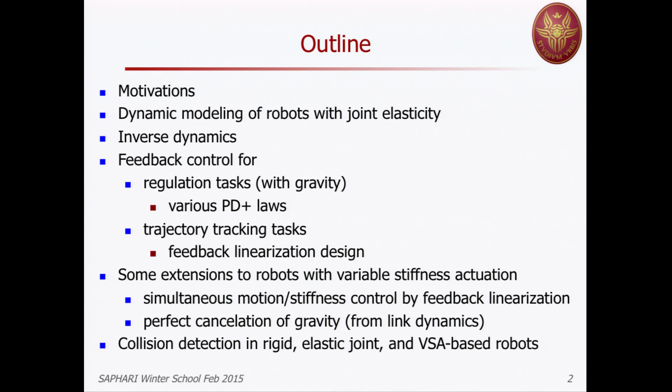And then when you address the more challenging issue of following a trajectory and recovering from disturbances and errors, we will use the feedback linearization design technique. So all this, in a sense, generalizes what you already know well for rigid robots—from the Siciliano Sciavicco textbook—to the case of elasticity and flexibilities.

So having presented this for the joint elastic case, I will then extend to robots with variable stiffness. There we are interested in controlling not just motion but also stiffness, as we mentioned. So how feedback linearization can be used for doing simultaneous and decoupled control of motion of the links and stiffness of the joints. We will address this for a single device, but the extension is pretty much straightforward to multi-degree-of-freedom systems, provided you have a good model.

And then I will conclude with this perfect cancellation of gravity, and then some examples of using these techniques for collision detection and reaction.

Okay, motivation: why do we address flexibility, and in particular flexibility in the transmission? Well, in industrial conventional robots, which are massive, the first thing that is compliant is the transmission.

So if you have a long shaft, like in the traditional Puma arm, where the motors are mounted on the elbow and three motors drive the last three joints, you have this long shaft subject to torsion. You can model this torsion as a concentrated torsional spring, in fact.

Or if you're using harmonic drives, which are inline, compact, large reduction ratio transmissions, they are intrinsically flexible because of their construction—the fact that they have a different number of teeth on the inner and outer gears introduces this kind of flexibility.

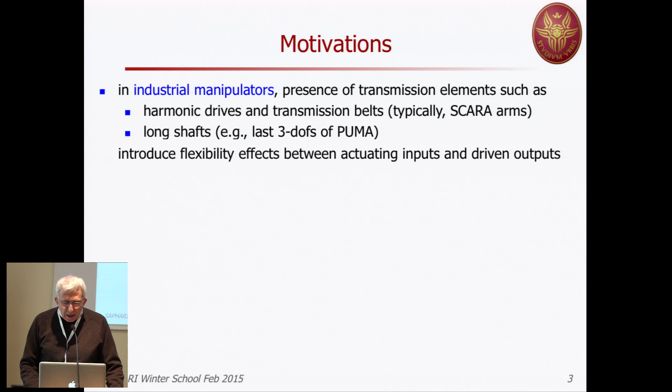There has been an intentional introduction of flexibility. Up to some years ago, harmonic drive technology was something you would want, because it gives a reduction ratio of 150 to 100 with relatively low dissipation of power. So you can have a small motor driving heavy links, but you have to live with vibration induced by the flexibility of these joints.

A completely different story is when you introduce flexibility on purpose, like in series elastic actuation and whatever you've heard so far here. There are several reasons for doing this. I'm mentioning only safety, but there are also performance and energy aspects which are very important.

How is this introduced in this type? Here are some examples, including variable stiffness actuation, or a device developed in Stanford, a redundant macro-mini or parallel actuation device where you have two motors for moving a joint, but one motor is located at the base with a transmission, and a small motor at the joint which corrects the flexibility induced by the transmission.

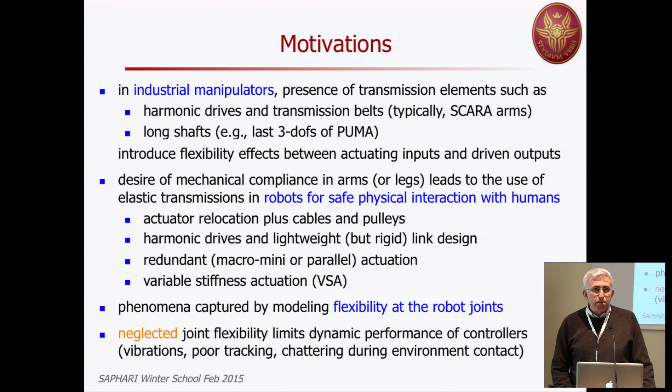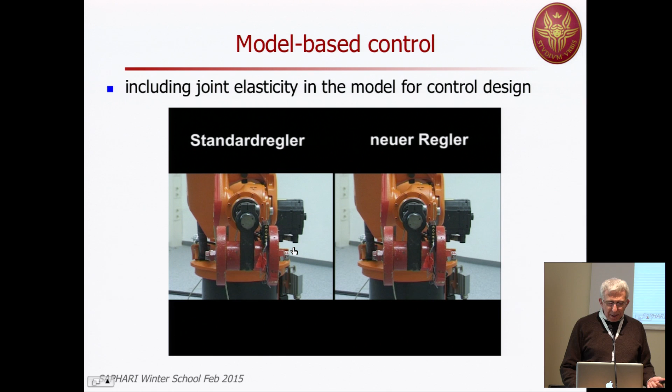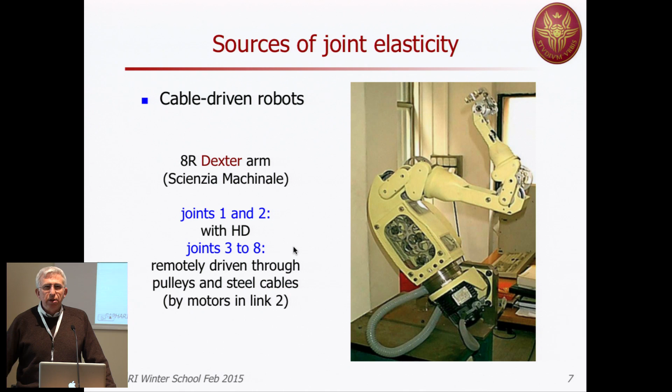This arrangement makes sure that it enables the fact that this arm, which is human size-like, as you can see, is 20 kilograms as a total, in motion.

While for the joint elastic case, we typically remain in the domain of linearity, although you can consider also some nonlinear effect, but you excite this nonlinear effect only through motion, and you cannot control directly the actual deformation. Okay, so we focus now on this situation.

This is just a single joint. Theta is the position of the motor, Q is the position of the driven link, and you have some elastic torque going through the transmission. The transmission has some stiffness K, and let's say constant stiffness.

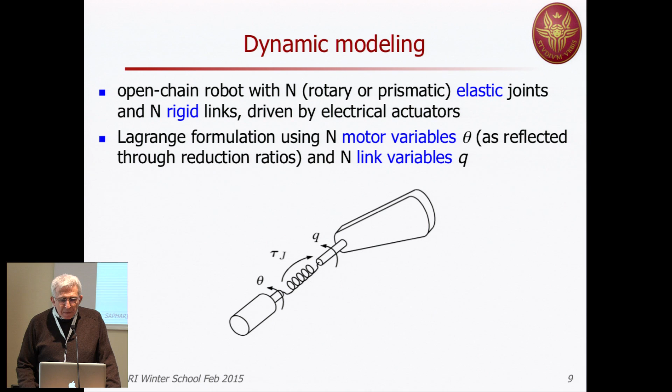And then you set up a set of generalized coordinates, in this case 2n generalized coordinates, if n is the number of joints, so 1 coordinate for each of the motor and of the driven link, and then you apply the Euler-Lagrange equation. So if you do this, you have to derive all these energy terms.

So there are some basic assumptions which are really always satisfied, at least the first two. The third one, most of the time, let's say 95% of the time. The last one is an approximation, but it's very reasonable when you have a large reduction ratio. So the first one says that, well, simply, we are in the linear elasticity domain. This is an assumption. You can relax this without major problem.

The second is obvious: all the motors are balanced, which means that the center of mass of the rotating motor, we are assuming electrical motor, let's say DC motor or whatever, is on the rotation axis. Otherwise, you would throw this motor away after a few minutes, few hours of operation.

The other assumption is more at the system level. So each motor, let's say, suppose that we have one motor for each joint. But anyway, even if we have a combination in parallel, each motor is mounted along the open kinematic chain in a position which precedes the driven joint. You typically think of a motor mounted exactly on the axis of the joint, but this is not really the normal case. This is included in this assumption. So either it's here or it's before.

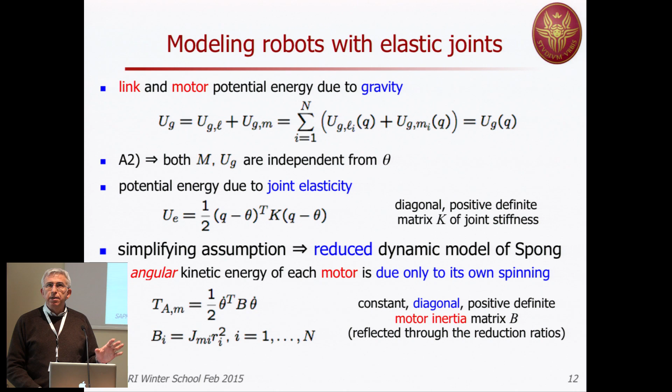And this is very reasonable, especially if you have a large reduction ratio. It's not perfect, but it works. And in practice, this has become the standard.

So once you have put also this assumption 4 and you build up the Lagrangian with the total kinetic energy minus total potential energy, you have this 2n-dimensional set of generalized coordinates. You apply the Euler-Lagrange once for all.

You will never use this again because you already know what is coming out. For instance, you never reintroduce this and then make this derivative, because you already know that in the kinetic energy, what is here and here is actually in the quadratic form, so you don't need to do partial derivatives if you're deriving these models in a symbolic way.

So the end point is this one, and we will start from this two set of equations, which I call link equation and motor equation. This, up to here, is exactly like the rigid case.

In M, you include already the presence of the motors, okay? At least the linear part of the kinetic energy. These are the Coriolis and centrifugal terms. This factorization is such that M dot minus 2C is skew-symmetric if you wish, otherwise you don't need that.

And here, of course, you don't have any non-conservative force performing work on the link coordinates. We are assuming that there's no dissipation term and no external force acting on the link, while the torque produced by the motors produces work on the motion of the motor variable theta.

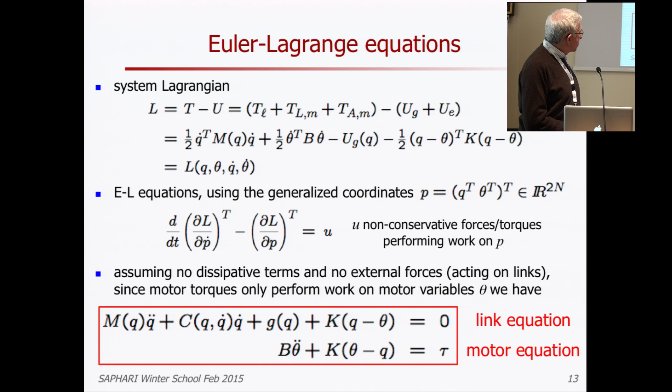Instead of looking for this limit process, you can go back and just add up these two equations, so that this term cancels and you don't worry about the fate of this infinite times zero form. Of course, you keep q equal to theta, so theta double dot becomes q double dot, and you have this B adding to this part, ending up with the equivalent rigid model, which is exactly what you expect, with the diagonal B matrix adding to the residual part of the kinetic energy we have computed so far.

When you have joint elasticity, you have to split these two parts. And if you remove the Spong hypothesis, then this splitting is not so clean as here, because you have also coupling terms appearing.

Then this is another famous inequality, because the gravity part is acting only on the link side, since the motors are balanced with respect to their center of mass. So the gradient of the gravity vector, the Hessian of the potential energy associated to gravity, is upper bounded in norm by some constant alpha.

This also implies another inequality, which is very convenient in proving global asymptotic convergence of the PD plus controller. I would invite you, when you have time, to apply this to a simple structure and understand the role of each assumption.

So here it's a planar 2R robot with elastic joints. This could move in the vertical plane, so you include gravity, or in the horizontal plane, so you don't care about that. And of course, you have a position of the motor here.

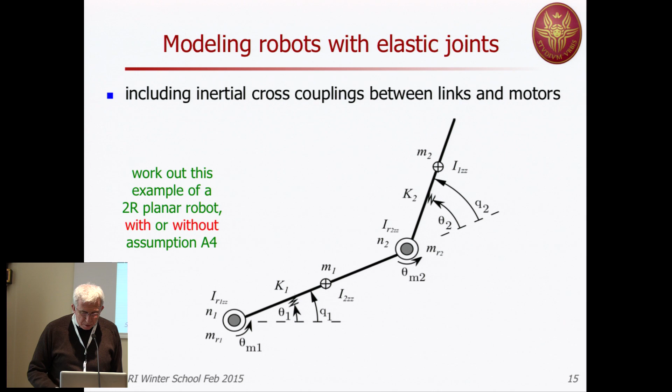Otherwise, you will have some coupling in the total inertia matrix. It's not partitioned with M and B in block diagonal form. You will have some off-diagonal terms, and this creates a lot of problems from the control point of view, but I'm not going to talk about that.

So with this model, what can you do? You can do inverse dynamics. Suppose you're interested in the position of the link, not of the motor. So you may assign, as if the robot was rigid, some Cartesian motion to the end effector, do some inverse kinematics, and have some desired trajectory for the links.

So some qd of t. Inverse dynamics means: if I want to have some motion of my links, what is the input torque I need to apply? For doing this, I need to compute the trajectory of the motor, which is not given a priori and depends on the dynamics of the system.

But this is very simple, because you just take the link equation, the first set, where theta appears in a linear way. If the joint is not linearly elastic, so you have some nonlinear effect, then this creates some problem because you probably need to solve this equation numerically, but this is kind of simple.

In this case, you have an explicit closed form expression for theta. All the other terms depend only on q, so you set the desired q there.

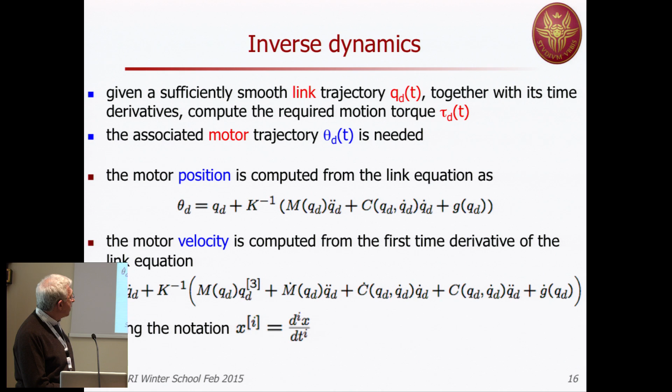And then you can take the derivative of this, and in fact you have the motor velocity associated to the desired link trajectory. You see that some very complex terms appear, but they can be computed. For instance, you take the derivative of this, and this provides these terms because you take the derivative of the inertia matrix with respect to time, and so on. This is the notation I'm using here.

Now you have to do this one more time. So you take the second time derivative, and you have the desired acceleration of the motor, associated to the desired acceleration of the link, plus again terms that now we understand how they arise. For instance, this g double dot is the second time derivative of the gravity vector.

It's a function of qd. Once you take the two derivatives, this is internally a function of qd, q dot desired, and q double dot desired. But everything is desired, so everything is known in advance, so this can be computed. And now the last step is very easy.

You just take this expression, instant by instant, and plug it into the motor equation, and you have the desired torque, which takes this nice form. So you can reorganize things.

In particular, you can see that if you let k go to infinity, all these extra terms, these long terms, just vanish, and you're left with the conventional inverse dynamics of a rigid robot: mq desired plus b, the inertia, the diagonal inertia matrix of the motors, and then the Coriolis terms

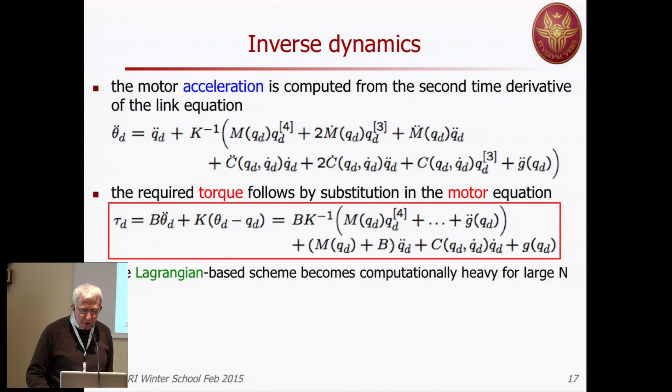and the centrifugal terms and gravity terms. Now, all this suggests that if you do this for a 2R planar robot with elastic joints, it's fine. If you do this for a 7 degrees of freedom robot arm, you start running into trouble. If you do this for a 45 DOF humanoid with compliant joints, you may take a long while to get into the Lagrangian expression, and then you have to evaluate this for inverse dynamics, not in real time, but later on for feedback control, you need to evaluate these terms in real time. So this is quite complex.

This is why one can develop—actually this is work that has been around for a while, and now we're producing a paper on that—a modified Newton-Euler method, so that you have to know all the dynamic parameters, but then you can compute a recursive expression, in linear complexity time with the number of joints, so that you end up computing this numerically and never building the symbolic model of your robot. So this is quite convenient.

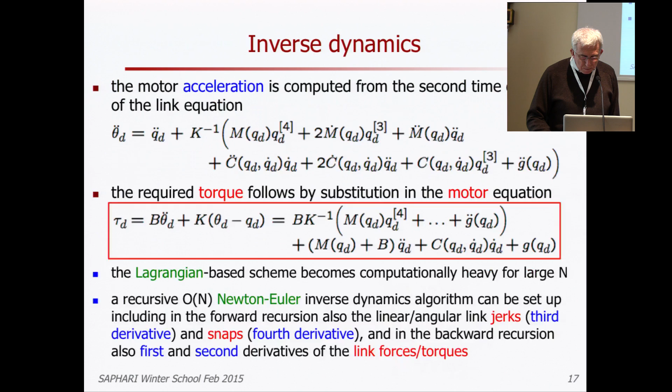When you move from offline computation, inverse dynamics, pre-planning and so on, to online, you need sensors. So what changes here? We have seen that we have two variables for each joint. If we want to apply full state feedback, we need to sense four variables: the position of the motor, the position of the link, and the velocity of both sides. So we have 4n state variables for this n degrees of freedom elastic joint robot.

Typically, especially if you don't know your robot has elastic transmission, you just mount sensors on the motor side, measuring theta and theta dot. In the old days you had tachometers, now you just have very accurate encoders, and you get velocity by numerical differentiation. Of course, if you know you have this issue, then you mount additional sensors, either position measurement beyond the elasticity, or some joint torque sensor, which can be used in combination with motor sensing to provide information on the link side. And you have different combinations of that.

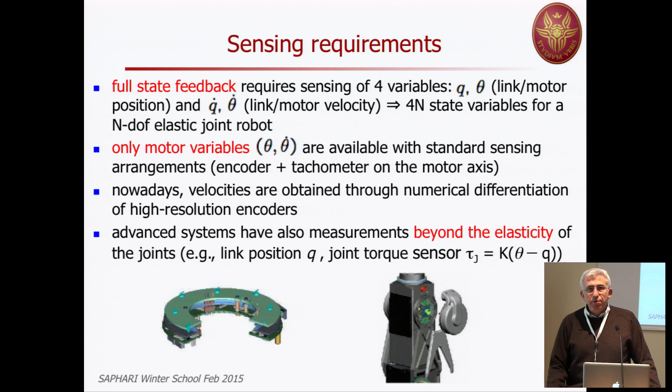For instance, this is an exploded view of the famous DLR-3, where you can see this has all been designed and optimized in space and weight. About sensors—here, the first position sensor is on the motor, before the transmission. Then you have the harmonic drive, and then a link position sensor. And then you also have a torque sensor mounted, which measures the transmitted torque. So in fact, you have 3 sensors for 2 variables, so you have slight redundancy.

In practice, at DLR, they're using only the motor position and the joint torque sensor, and from there, knowing the stiffness of the transmission, they reconstruct the position of Q. This is also my interpretation of what KUKA is doing with this fast research interface—the user is provided with a Q variable, although internally the Q variable is not directly measured.

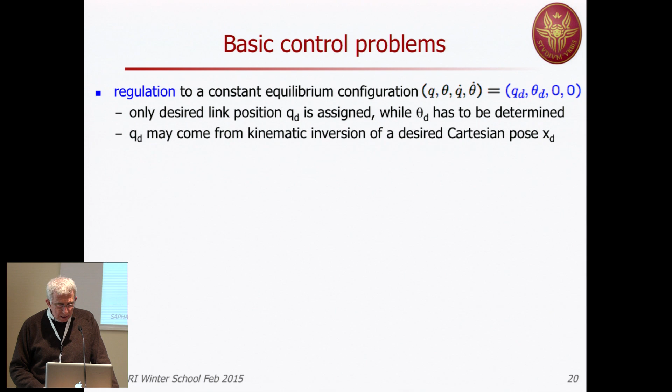So what are the basic control problems? Regulation, which means we want to go to a constant equilibrium configuration, and the only thing the task assigns is the position of the links, not of the motors. And of course, again, this position may come from some Cartesian specification. Or we want to track in a reliable way, meaning not just starting on track, but even if we have some initial error or disturbance that brings us away from the desired trajectory, we want to recover the trajectory as fast and as smoothly as possible.

You may suspect that since we are considering a flexible system, the trajectories we can reproduce exactly should have smoother characteristics than those reproducible by a rigid system. This is correct, and in fact the inverse dynamics told us we need the 4th derivative present to be sure we can exactly reproduce a trajectory when we start matched with that. So again, we are assuming sufficient smoothness for the reference trajectory.

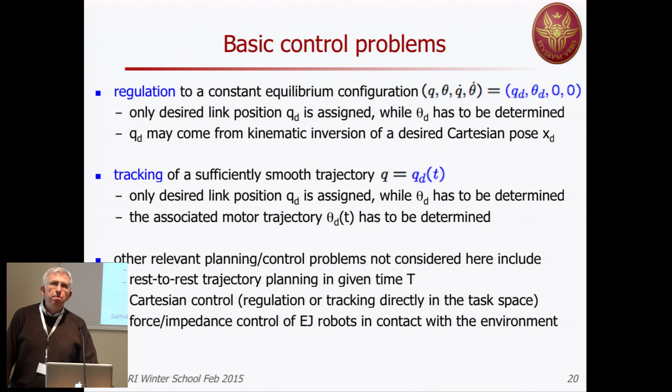And then there are many other problems we are not going to talk about. For instance, interesting here are rest-to-rest maneuvers in given time, because you have flexibility and you want to eliminate this flexibility at the target final time. Or Cartesian control, like in the rigid case, and even force and impedance control. I will say something about impedance because I promised that in my original title, and it's not a positive statement, but you will see later on.

So let's start with regulation, and let's start with the most simple case. I'm taking for illustration a device used for academic purposes. It's a linear flexible joint, two masses connected by a spring, moving in the linear plane on a linear rail. You can imagine that this is the inertia of the motor.

This is the actuated part, so this is the position theta, now it's a linear position, but you don't care here. Then you have some stiffness connection, and then you have the unactuated link mass m, with its position q. If we neglect friction, in this case the model is very simple. It's linear, because there are no gravity effects and no Coriolis term, only a constant term in the inertia and so on.

For this analysis, you can do a Laplace transform and define the transfer function from the input to the variable of interest, the position of the motor itself and the position of the link. Of course you want to control this, but it's good to know to have also the transfer function to the position of the motor, because you may need to close the feedback loop from that quantity, and you don't have an explicit measurement of q, for instance.

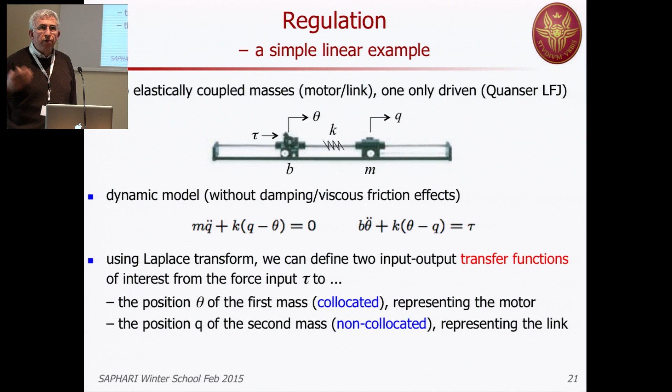I mention this as the collocated transfer function if I'm taking this as output, or the velocity as output of the motor, and non-collocated in this other case. Pay attention, if you had distributed flexibility on the link, the non-collocated case is prone to instability when you try to invert the reference trajectory for the tip of a flexible link. This is not the case here, but still the non-collocated case means something.

So the motor transfer function looks like this. You have the rigid body motion, and then you have a pair of zeros and of poles. The system is unstable because of this relation, but it's passive because if you look at these imaginary zeros and poles, you have a pattern of zeros always preceding the associated pairs. Here you have only one pair of imaginary zeros and one pair of imaginary poles.

So this is a characteristic that can be interpreted as passivity in this linear transfer function domain—not in time, not in energy, but it's exactly the same concept. If you take the other transfer function, from the torque to the position of q, still the rigid body motion, you see that the zero has disappeared completely. This is the case of no damping, no friction, and no other effect, so in this case there are no zeros at all. If you introduce some damping, then these pairs move to the left-hand side plane. This is the limit case, and this is why you would like to consider also this limit case as the control design basis.

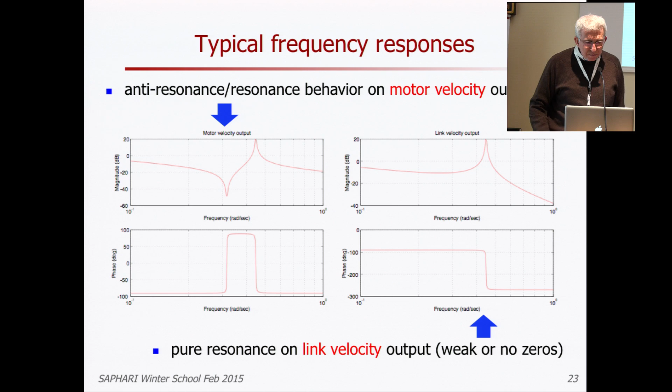Now, if you collect some experimental frequency response, this is how the Bode diagram looks like, with anti-resonance and resonance. If you're taking as output the position or the velocity, in this case I removed the pole at the origin of the motor, while you have a pure resonance when you're taking the velocity of the link as output. Now these are with no zeros or practically no damping.

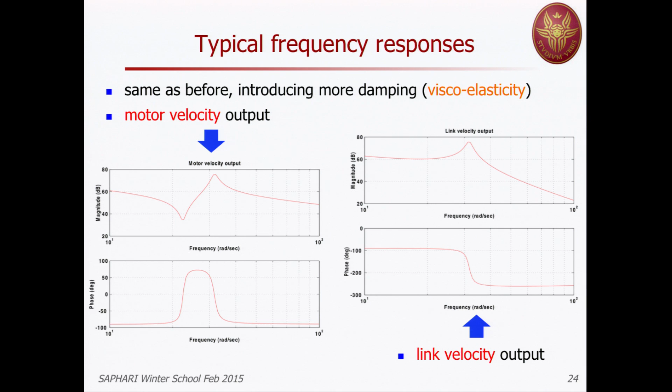If you add some damping, the profile looks pretty much the same, only smoother. There is no sharp 180 degree variation in the phase—everything is smoothed—but you can still recognize some peak in the frequency response, this anti-resonance resonance profile, when the output is on the motor side. This is something I took from the chapter in the Springer Handbook.

So you can imagine closing feedback with partial measurement, not with the full state. So like a poor man's design, you have only one position sensor, and probably you can extrapolate the second one with numerical derivative, on one side or the other side of your transmission.

So what happens if you're doing pure link-side PD feedback, taking the actual position of the link beyond the elasticity, and its velocity, and you build up the closed-loop transfer function? Using these gains, you recognize that there are some terms missing power in the denominator, so this is always unstable.

While if you close the feedback loop all on the motor side, because of the passivity, but also because of this simple analysis, you see that this is asymptotically stable as long as you have positive gains here, no matter which value, like in a rigid system. This is very convenient.

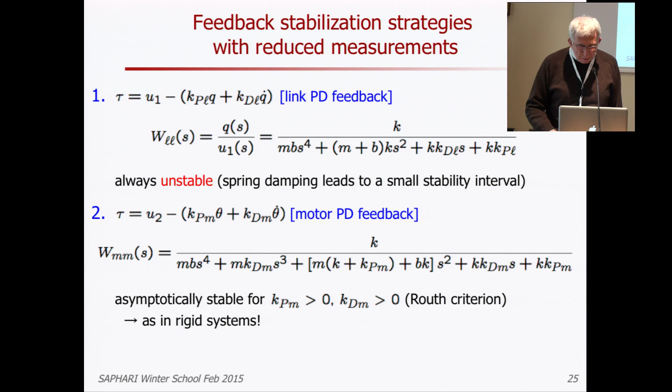So this simple analysis shows that after all, if you want to regulate things and you don't have full state feedback, you should close your PD controller on the motor side. This is the most convenient situation, okay?

And in fact, if you do this and you don't have gravity, you have a multi-degrees-of-freedom elastic joint robot, this is perfect. Of course, transient may depend on several other choices, but asymptotically you have convergence, okay?

So this means that we focus now on the motor PD feedback while moving from this single-degree-of-freedom case, linear case, to the multi-degrees-of-freedom nonlinear case.

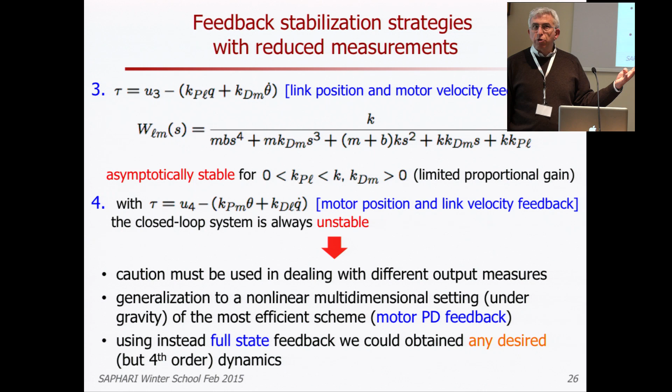The other comment I would make here is that, of course, if you have full state feedback, measurement for all the states, all four dynamics, then since the system is controllable, you can impose whatever dynamics you wish. But this dynamic should be of the fourth order. We will come back on this when we talk about impedance control.

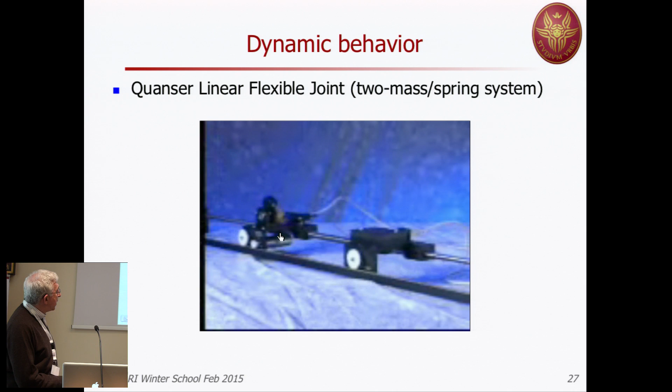So this is just a video by Quanser that shows the behavior, and depending on how you close the loop. This is the output mass, and there's a connection here that you can see or not see. This is the motor, the driving motor. You see it's doing some oscillation, which is amplified, since it's near the resonance frequency in this case. So the motion of the motor is amplified at the level of the link.

And here you have a rest-to-rest maneuver, without output feedback, so this is just the intrinsic damping that lets the load stop. And here you're doing full state feedback, as I was saying. You see there is some residual oscillation, but it's pretty much a good transient behavior.

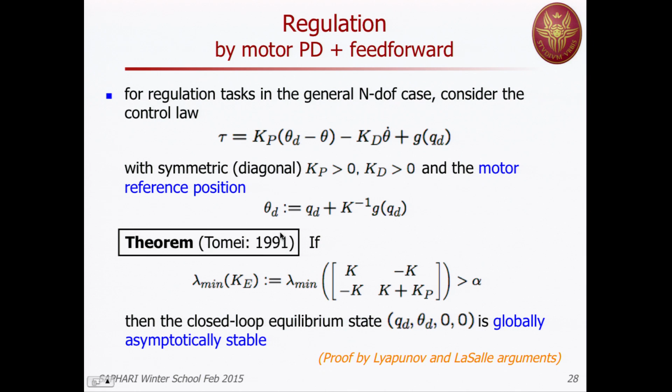So, without proving any results, now I will detail the basics of regulation for the general case, in presence of gravity. The oldest result is from my colleague and friend Patrizio Tomei in '91. He proposed this kind of control, a PD control on the motor side.

QD is constant, so theta desired associated is constant. We are closing a proportional term and damping out velocity of the motor, and adding a constant gravity compensation term at the target destination. From the beginning, if we want to be there and we start from here, right from the beginning we are applying the torque, the gravity torque needed to stay here.

So this is a linear plus constant feed-forward controller, the simplest thing you can think of. The only trick is that, of course, you have to provide this reference, and since QD is constant, in the inverse dynamics everything blows out, and what is left is this part.

So you see that the position of the motor should be different from the position of the link because of the load of the gravity, and this is less and less sensitive the more the joint is stiffened. In case gravity is not there, these two at steady state are exactly the same. Otherwise, you have a difference. This has implications also for the variable stiffness case, of course.

So what Patrizio showed at that time is that if you have a lower bound on some matrix, which is a combination of the stiffness K of the joint and the proportional gain Kp, and if the minimum eigenvalue of this symmetric matrix is larger than alpha, the bound on the norm of the gradient of the gravity term, then the closed-loop equilibrium state, that one with zero velocity, is globally asymptotically stable.

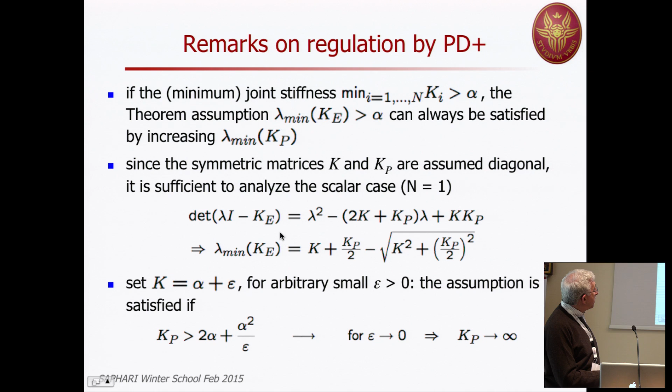So you can see that you have a lower bound for Kp, which is 2 alpha plus alpha squared over epsilon. Of course, when epsilon goes to 0, so you're not strictly larger than alpha with your structural stiffness, then you need to have an infinitely large Kp. Otherwise, this is a proof.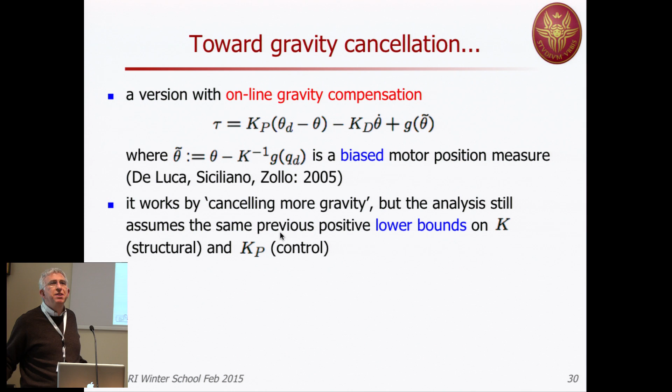So, unfortunately, in the proof we were not able to relax the lower bounds on K and Kp. So, what's the use of that? Well, these are sufficient conditions. So I just show here some simulations that we did at that time.

And you can see it's a 2R robot in the vertical plane. The alpha is 133 here. So you should be at least twice as large. You cannot see it from here, but this set of gains satisfies the condition, and this set of gains does not. So you violate the sufficiency condition.

Now, if you're applying Tomei's controller, in this case, you see that the error is not going to 0, while with our case, it's going to 0 and even faster. In this case, both go to 0, but this is much slower than canceling as much of the gravity online as possible. Okay, so it has some practical value.

And in fact, even at DLR, Christian Ott and Alin Albu-Schäfer in particular, one year later or three years later, they came up with a variant of this. Instead of having theta tilde, they have a Q bar. It seems like the same thing, but this Q bar is computed in a different way.

If you look at the steady state equation, when everything is in equilibrium, whatever this equilibrium is, you have a situation like this. Okay, suppose that theta and Q bar are the equilibrium condition. Now, if I give you a Q bar, you can compute immediately the theta. But because I measure theta, I need to solve this nonlinear equation and find the associated Q bar.

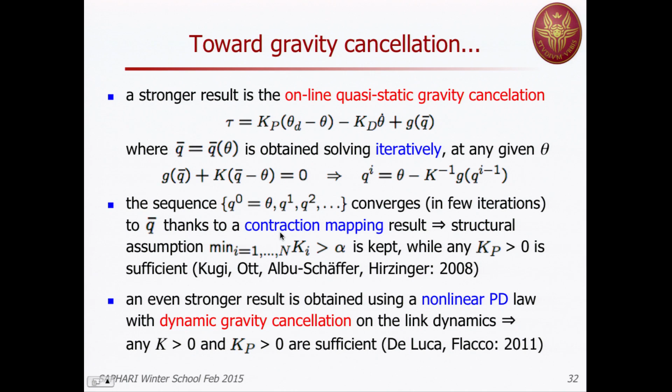So this is another way, a more sophisticated way than ours to compute these things. In fact, they were able to relax the condition, so provided that this holds, you have no lower bound other than having a positive gain for the proportional term. So after a while with Fabrizio, we found, well, this is still linear but requires some iteration computation. This is a nonlinear PD law with some dynamic gravity cancellation, and we were able to prove global asymptotic stability for any positive K and any positive Kp.

And that's it for regulation. What about trajectory tracking? As I said, the desired trajectory should be smooth enough, so there should exist the fourth derivative, in much the same way as if you want to guarantee perfect tracking in the rigid case, there should be an acceleration. Even if it's discontinuous, then you will have discontinuous torque. But this is the minimum requirement. Here, the fourth derivative should exist.

We are assuming the full robot state is measurable, and again, we have a good dynamic model of our robot, including stiffness, possibly after identification. So these are very strong assumptions, I would say.

With this, it's a joke to design a controller, okay? But at least if you do that, you should do the design in the right way, and many people haven't done this because they said, well, in order to do feedback linearization for this class of robots, you need to measure jerk or whatever, and you never will have this, okay? But if these are the conditions, then you just need to measure whatever state you have, okay? So nothing more than what you expect, okay?

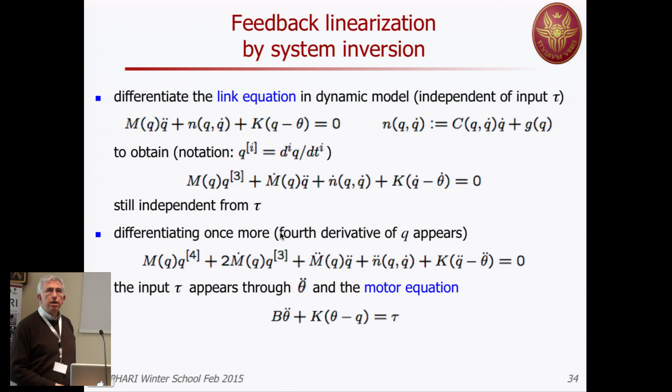And then here you have theta double dot appearing, and then you rely on the motor equation, because this theta double dot is the same as here, so you can use this equation to let tau appear and then cancel whatever nonlinearity is there so as to isolate Q4 dots. In fact, when you substitute things and you build up this very complex term, you cancel all nonlinearity, like you do automatically in the rigid case, but now you do it at a higher differential order. So this is the control law, and this is the result.

Not surprisingly, it's not a double integrator, it's a fourth order integrator. So you have n chains of independent 4 integrators from each new input A to each position Q, joint by joint. So you have linearization and decoupling. And now the comment: can you compute this control law, which apparently depends on theta, on Q dot, on Q double dot, and Q triple dot? Okay, so at this point, many people stop and say, no, this is bullshit.

Well, if you have a model, then—this is something you never have to do in the rigid case—you need to invert the inertia matrix, or use the articulated body method to avoid the build-up of the inertia matrix, for the isolation of the acceleration.

So in any case, from the link equation, which is not dependent on tau, you can always isolate the acceleration, and this is its expression. So Q double dot is a function of Q, theta, and Q dot, which is what you're supposed to measure.

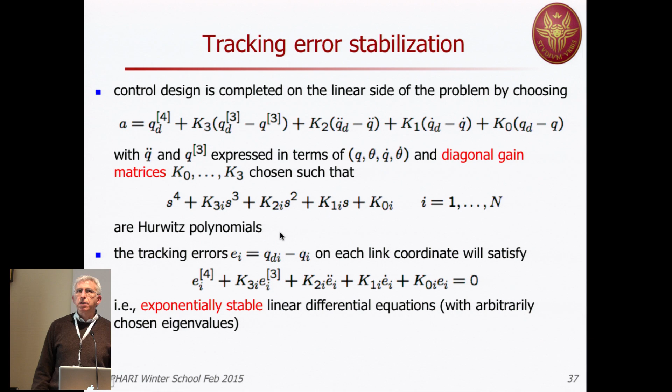And this guarantees asymptotic stability, but in fact exponential stability, because the system has been converted into a linear system. So asymptotic equals exponential in this case. This is a very powerful result under strong assumptions, but this is what I wanted to mention.

Now, it's interesting to see this design we have—why were we able to do it? We have not checked necessary and sufficient conditions for feedback linearizability. We just built the controller constructively, so we solved the problem in a constructive way.

But the reason this works is related to the same observation we made in the single-input, single-output system of a linear transfer function. So in terminology of nonlinear control, the system has no zero dynamics, which means, in the linear transfer function, that the transfer function from the input to the output we are controlling has no zeros. And this is the nonlinear, time-dependent concept in the time domain.

Maybe some of you have heard about flat outputs, and this is exactly the same. So I would say, since the system is feedback linearizable, then Q is a flat output. In terms of nonlinear control theory, the Q are linearizing coordinates. Somebody has also called them flat outputs—it's exactly the same thing.

Now, of course, there are some simplifications of that—you can simplify things. I will skip this; you will have copies of these slides at the end of the course or tonight.

So, very few people have implemented this type of feedback linearization controller. What they have implemented instead is this kind of local asymptotically stable controller.

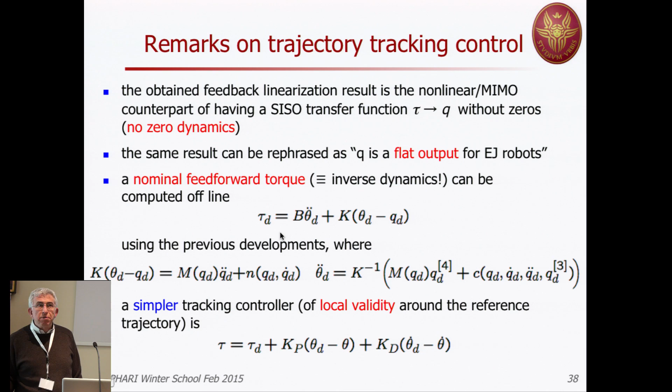So a note on impedance control. Feedback linearization is, I would say, an exceptional design tool for free motion control. Up to now, we have not seen any interaction with the environment. What about tasks that would imply, at some stage, some interaction and some need to control the exchanged forces?

So if we have rigid robots, we can do this in several ways. But in fact, the impedance controller is nothing else than a feedback linearizing controller, converting the system into chains of double integrators, and then selecting the acceleration input so as to match a desired mass-spring-damper model, linear or nonlinear, typically linear and decoupled. If you assign arbitrary target values to the spring and damper, that is the stiffness and the damping, then that is what you call compliance control.

If you're also modifying the mass, then you have a target inertia, replacing the actual inertia of the robot in the joint space or in the Cartesian space, or at the contact point where you have the interaction. Then this is really impedance control. And in that case, as soon as you modify the inertia, you need to have a measure of the contact force.

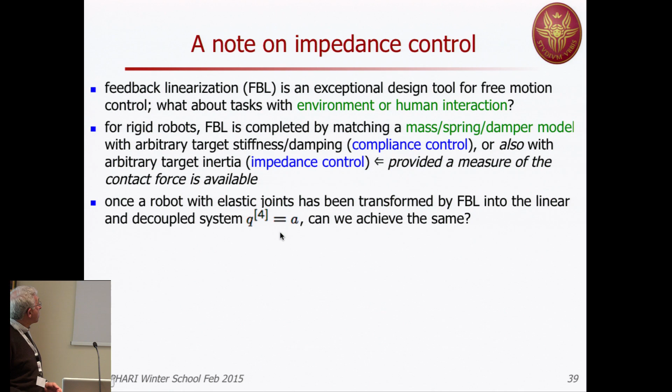So if you want to do impedance control in the joint elastic case, you may think, okay, I apply feedback linearization first and obtain this decoupled system. Can I achieve at this point the same performance as in impedance control? The answer is no. Or not in a clean way, not as easily as you can in the rigid case.

So what are the problems? First, if there's a contact force on the right-hand side of the link dynamics, remember we have differentiated the link dynamics twice. So if a contact force is measured, we need to differentiate it twice, because we don't have a direct measure of the derivative of the contact force, nor of its second derivative. Here I cannot go past this point. So this is one basic issue.

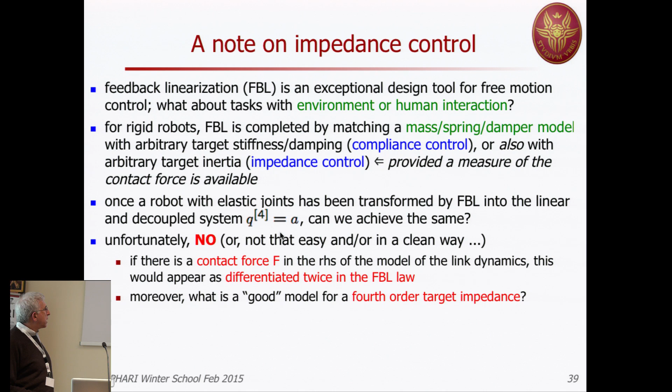But suppose you get around this problem in some approximate or estimated way. Then you have a second problem, which, to my knowledge, nobody has attacked yet. You have a fourth order system, so what kind of fourth order target impedance are you going to choose? What is the good model for a fourth order mechanical system? You could take a mass-spring-mass with a big mass and a very tiny mass, so that it's almost equivalent to having just one mass, or you try to distribute the total mass between these two elementary masses.

So this is an open issue. It's a matter of targeting your desired behavior with an impedance scheme. So what do people do in practice? This is the 'no' part. Now the not-so-clean way: people do things, and in fact we've been doing something too. What you do is a kind of backstepping-like design.

You assume on the link dynamics that your elastic joint torques are directly controllable, like an input, like current that you can impose on your DC motor. So you have exactly the rigid case. You design whatever controller, including an impedance controller, including the fact that you measure the force there, and you have an expression for that. Then you try to design a control law that imposes this elastic joint torque through your motor torque. So you step back, and move from the second order dynamics of the link side to the full fourth order dynamics where your inputs are the motors.

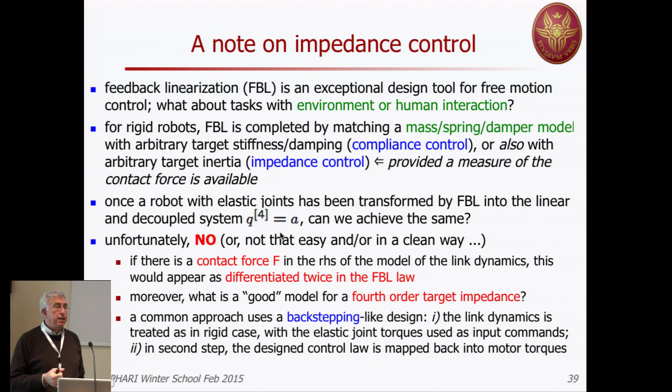So it's completely transparent to the end user. I mean, if we were not academic professors, probably few people around the world would worry about this. You just use this robot as if it were rigid. In fact, you don't even have information about the actual stiffness and other parameters of the local controller inside this. Okay, a few extensions, very.

How much time do I have, Giorgio? It's okay, we still have time.

VSA-based robots. We are interested in seeing if these techniques, Lyapunov-based or based on feedback linearization, can be used also for variable stiffness actuation. In particular, we want to check directly the difficult case: if those systems are feedback linearizable, and in particular, also input-output decouplable. Pay attention, since here you want to control two things for each joint, the motion of a joint and the stiffness of the joint. So even if you have only 1 degree of freedom in the conventional sense device, you have 2 inputs and 2 outputs. So the problem of decoupling makes sense.

In the joint elastic case, decoupling makes no sense because you have 1 input, the torque, and you want to control the motion of the link through the elastic joints, but you cannot control the joint stiffness. So decoupling is important. It's coming for free in general, but in this case it's very important even if you have only 1 joint.

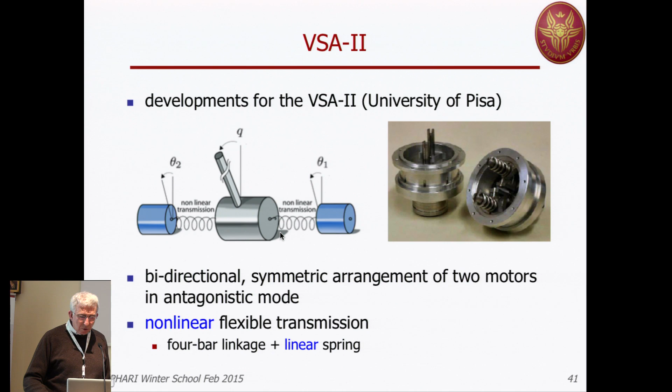More or less, this is the situation. There are 2 motors - this is the device open. The spring, the transmission are non-linear, but they are using pairs of linear springs with a 4-bar linkage. They had at that time, though I don't know if this developed later, a 4-bar linkage that introduced the non-linearity which is needed to change the total stiffness of the actuators. And this is the Grashof pair.

So, in fact, you invert this, so you command phi and you modify b, and with the b you load the spring, so you have a potential energy, which is a quadratic function of the deformation, because this is a linear spring, so it has its own k. But in fact, since you're moving phi in a nonlinear way, so you're changing beta in a nonlinear way depending on what you control, this introduced the needed nonlinearity, and then from potential energy you compute the elastic torque or the flexibility torque associated to this by doing one gradient, one derivative, and then doing again a second derivative, you have the stiffness. By the way, whatever is the form of this part, so whatever is the function beta, these steps are exactly the same for all situations. So this is kind of convenient.

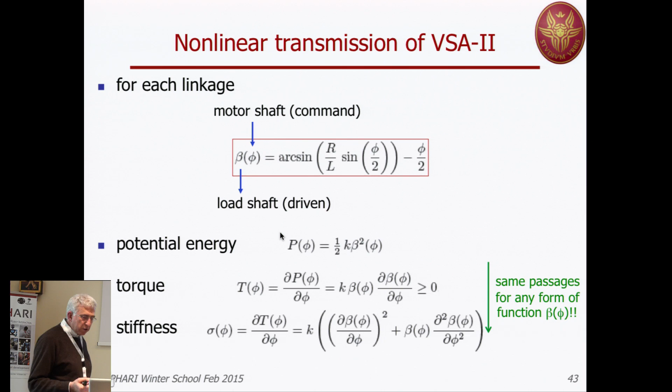So the model is this was for one single device. Now this deformation, since we have a pair of devices, the deformation will be the difference between the motor position 1 and the link position, and the motor position 2 and the same link position.

And then you have a total joint torque, which is just the sum of the two multiplied by 2, because we have two linkages for each motor side. And the total, or so-called device stiffness, is just the derivative of this with respect to the variation of Q of the total joint torque, so it has this expression.

Now, if you imagine to have a link moved by the VSA2, but this link is moving in the vertical plane, so you have a load which you can model in this form due to gravity, and this is the total situation.

So this is the dynamics of the motor. If you remember the joint elastic case, we had only one of this and then the link side. Now we have two of this with a nonlinear joint elastic part. Here it's not k times the deformation, this is nonlinear. And then, in this case, the sum of this is found on the other side, together with some external additional, let's say, collision torque that we don't consider from now on.

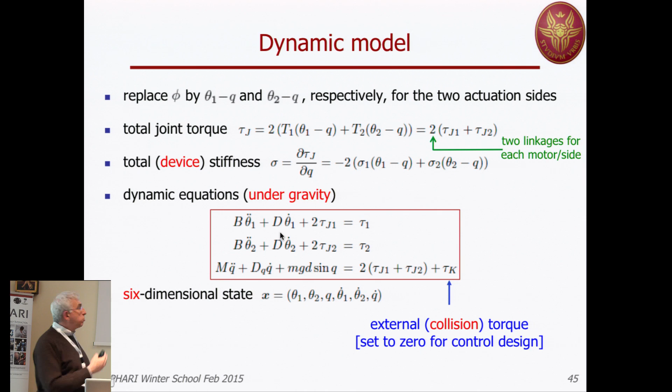So we have set all things in order to apply the theory of control. In particular, we want to do this inversion algorithm like we did in the conventional sense. So we define the 2 outputs, Q and sigma, and now we differentiate the output as many times as needed.

Until in the expression of the derivative of each derivative, there will be at least one input appearing, okay? And then we stop. When we do this for both outputs, we may need to differentiate a different number of times the 2 outputs until this happens. And then the matrix that multiplies the 2 inputs in this order of differentiation, which may be different for the 2 outputs, is the so-called decoupling matrix.

If this is non-singular, we can invert and linearize and decouple the input-output behavior. If the number of times that we have differentiated the 2 outputs equals the number of states, the dimension of the state space, then the same control law, rather than just doing input-output decoupling, also exactly linearizes the system. So there is no unobservable part in the closed loop, which is still nonlinear.

Okay, so let's check this, and in fact, this is what happened. If you take the position, you have to take the first, the second derivative, this is its expression, but still neither tau 1 nor tau 2 is appearing, so you take a further derivative, and then you use the expression of these parts, and then again, here you're not yet at the desired level. Then in the fourth derivative, you have some nonlinear function, and finally you have both torques of the two motors appearing, tau 1 and tau 2. Okay, so you stop here.

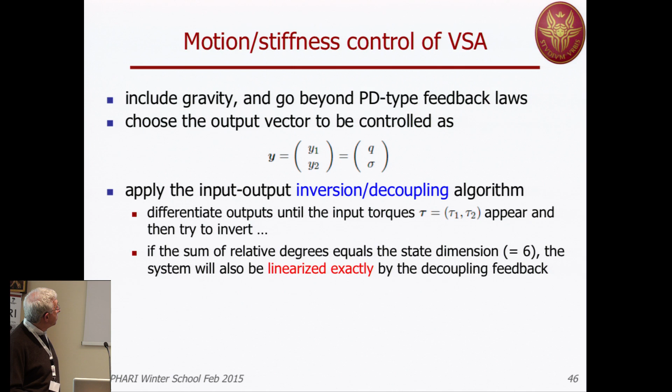In your equation, in the previous slide also, you modeled the dynamics of the motion and also the stiffness. But my question: how do you model the displacement and vibration dynamics, and how do you prove that when you control, your controller works and dampens the vibration and displacement?

Well, in fact, you're right. In this method, I don't use a Lyapunov function. Why is that? Because when I've converted the system into a linear system, then for me the proof is just assigning poles or eigenvalues, and this is done by those gains. I don't have to care about anything else.

So will I damp things? Well, it depends on where I locate my pole in the closed loop. Sorry, but we can also control the... care about the displacement or vibration?

No. Pay attention: the PD or PID that I'm applying is beyond the nonlinear feedback controller. It's not just that I'm saying a PD or PID is working. This will not work—I mean, it may work, but then I need to study if it's stable, what happens to the transient.

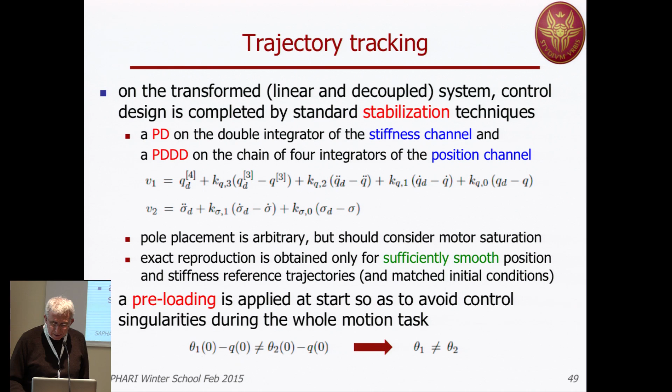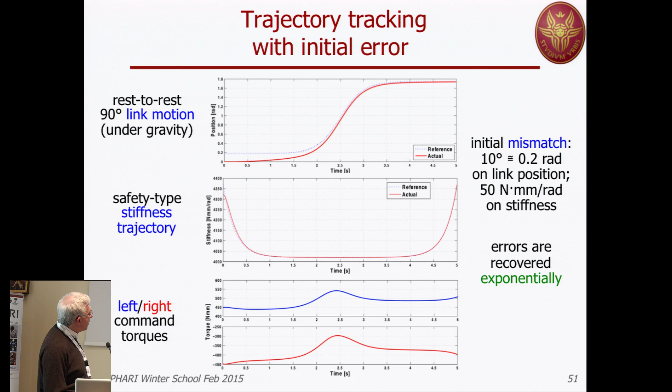So it's like reverting a jacket in this sense. Now everything was perfect, so there was no initial error, so you don't see any error here. If you start with some initial error - for instance here the reference position is 0 and goes to 90 degrees, 1.57 radians - and you start with 0.2 radians, you have an initial error, and I don't remember if there's a very small stiffness error here. You see that it converges, and similarly here, but the presence of an error here doesn't really affect the behavior of the stiffness profile because of the decoupling property. Again, there's some perturbation of the nominal torque compared to if we had started matched, but the error recovers in an exponential way.

Okay, so let's move to the next topic: perfect cancellation of gravity in a flexible system.

So what do I mean by that? We would like to mimic the same situation as in the rigid case, so the robot should behave as if gravity was not there. We know that for the rigid case, we just cancel gravity and then the system is floating in the absence of any other input in space - it stays there, if I move it, it goes to another place, but it stays there, and so on. We would like something similar for a flexible system.

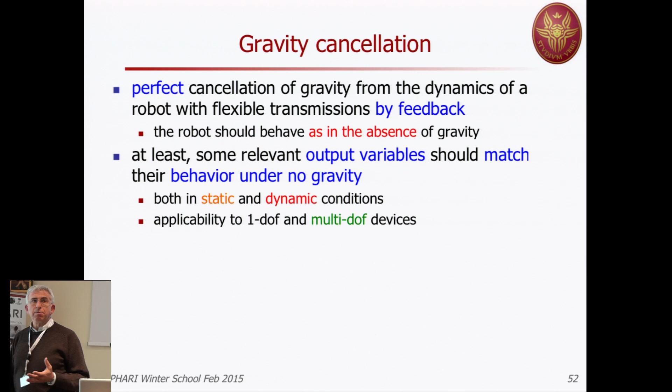Is this possible at all? This is the first question we have to ask ourselves. We may relax this requirement, because in fact it's not possible, and say: let's say that some output variable, the one I'm interested in, behaves as if there were no gravity acting on the system. Because if this happens, then those variables, which qualify the performance of my system - for instance, the fact that a flexible robot is reacting to a collision and going in the right direction without the effect of gravity biasing the response - this is really a practical aspect, and this is achieved.

So some output variable should match the behavior of, let's say, a model of the same system living in far space where there is no gravity at all. Suppose you have the same identical system but without gravity - the same variable should behave in the same way, with gravity and without gravity. Of course the input may, and in fact will, react in a completely different way, but that's a different story. And this should happen not only in static condition at steady state, but while moving at any time. So we are really asking quite a lot.

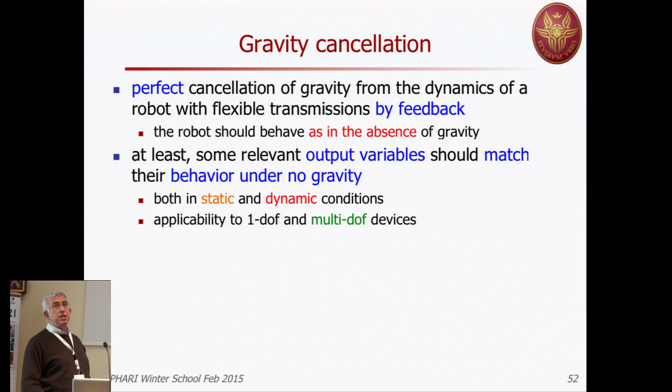And of course we would like to have these things apply for the single degree of freedom case or the multiple degrees of freedom case, and for the whole range of elastic or flexible joints with nonlinearity of the flexibility, and with variable stiffness actuation. So there are all the combinations - the application is exactly what I wanted. In rigid robots, we work in the zero gravity field, so gravity is always compensated.

This is useful also for designing reflexes to collision, which are torque-based, and also for regulation tasks. Without caring about human-robot interaction, we just want to go from one point to the other with good transient behavior, not only asymptotic stability but less oscillation. When we tune the gains, the presence of gravity is disturbing, so if we can remove gravity exactly from the variables we want to control, we'd have an easier task tuning the controller. I have three slides which pictorially show the problem.

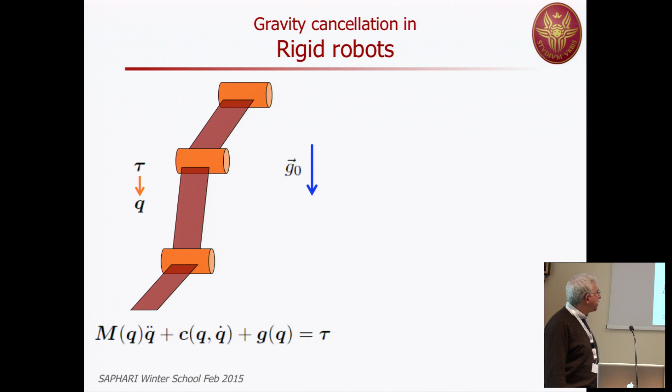Let's start with the easy case: a rigid robot, rigid in links and joints, under the action of gravity. This is the model. We design tau, and when we apply tau, there's some motion of the link variable q under gravity.

Now we would like to design this so the system behaves as if it was on a horizontal plane. The variables are the same, but their evolution is labeled q0, to remember there's zero gravity here. After we eliminate the presence of g, the remaining part is tau 0.

If you have this system and apply a torque tau 0, whatever you want—computed torque, PD, PID—and you get some motion q0, you'd like to have the same behavior of q0 despite the presence of gravity. It seems a trivial problem, but we need to formulate it correctly because later one may get confused.

In fact the solution is trivial: tau is just tau 0, the residual torque for doing what you want on the robot without gravity, plus tau g. And tau g exactly cancels the gravity term. The evolution of q will be exactly the evolution of q0, because this removes that, and the system is moving physically under gravity, but in fact only under tau 0.

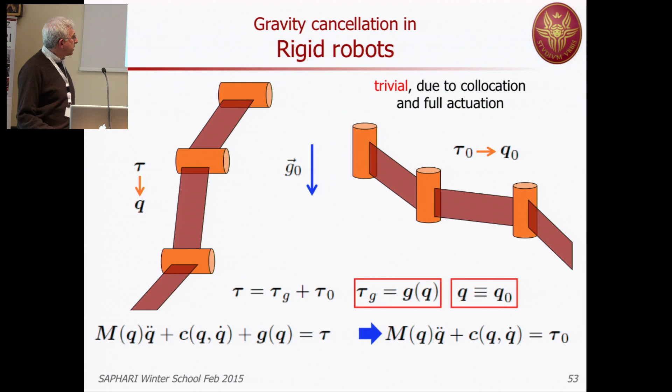Now let's consider flexible joint robots, so elasticity in particular. We have torque tau applied by the motors. This will modify theta, which will compress or exchange some potential energy, later moving the link motion. This is just three links, for representing things, q1, q2, and q3, under gravity—this is the full model.

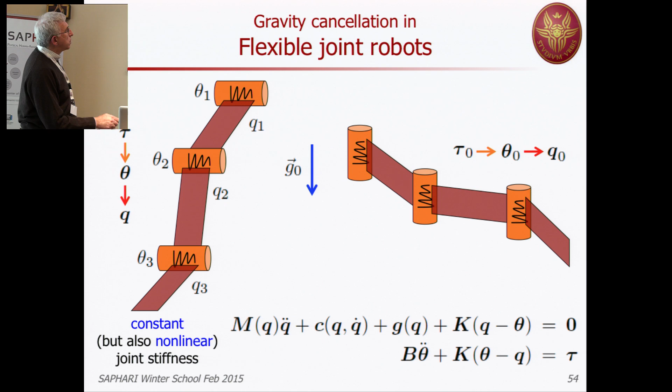You see there is no collocation between these terms you would like to cancel and this term here. So you would like to do exactly the same: design tau so this system behaves like one where gravity is not there, on the horizontal plane. When you apply tau 0, you'll have some motion of the motor position and then some motion of the link position, labeled 0. So here we have non-collocation, as mentioned.

Tau will again be designed applying tau 0, like if gravity was not there, but we need to design this tau g, and it cannot simply be the same tau as before. We may guess—let's just put g of q inside the expression of tau—and see if this works so we have consistency of the position of the links, not the motor, with respect to the model not loaded by gravity. I hope it's clear enough.

And of course, the same thing happens if we have variable stiffness actuation. Here I'm talking about antagonistic situations, so we have two motors for each joint. Tau 1 and tau 2 move the motor positions theta 1 and theta 2, and they interact in a coupled way in moving the links and changing the stiffness.

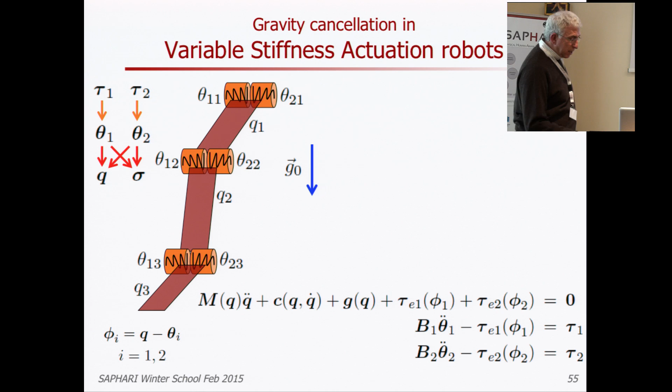Everything happens under the action of gravity. So this is the multi-degrees of freedom model in presence of gravity and with antagonistic VSA devices. This should behave, again, like this with all zeros.

Now we would like to design tau 1 and tau 2, if possible, so that not only the Qs behave like the Q0 of the unloaded case, but also the stiffness of this device behaves like the stiffness of this device, which is not under the permanent action of gravity.

So how do we solve the problem? We solve it by the principle of feedback equivalence. We know that if a system is feedback linearizable, it is equivalent to some linear system. The concept is very simple.

Consider the joint elastic case. I know that in the joint elastic case, there is a controller that will put the system into a chain of 4 integrators. And if I have the same original system, but without gravity, there will be another controller that brings the system to the same chain of 4 integrators. So they are feedback equivalent to the same system, and this is what this represents.

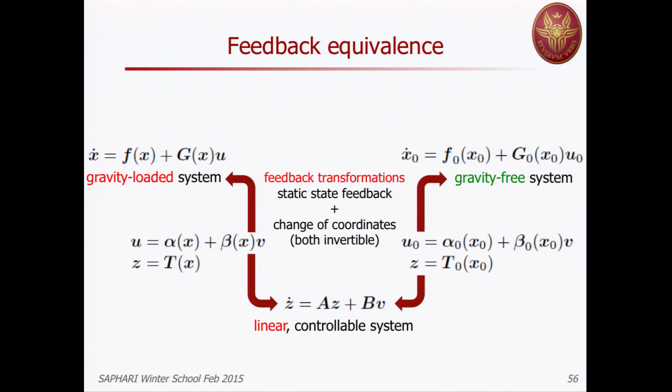We have a gravity-loaded system. There is some static feedback and change of coordinates in general, so that in the right coordinates, the linearizing coordinates, I see a linear controllable system. And then there's a gravity-free system, and if this is feedback linearizable, there will be another controller using the state of this system, and another change of coordinates T0, which brings it into the same linear controllable system.

Now, of course, this is a passage. If I'm combining things and inverting, I can go from one way to the other. So I'm applying some input to the gravity-loaded system so that this behaves in the right coordinates like the gravity-free system—not all the variables, but at least some variable, the linearizing output.

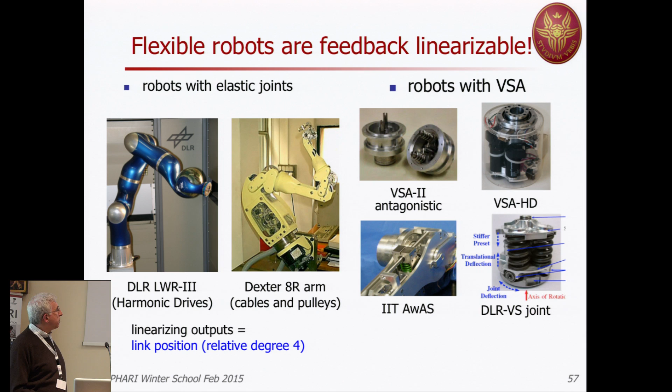So I need to check if those systems are feedback linearizable. And we know already that systems like this are feedback linearizable, and the linearizing output, those variables that can be matched, are exactly the link position with relative degree 4, because I have to take the derivative 4 times in order to invert the system.

Now, all these robots using these different types of VSA all perform in the same way, although the mathematics is different. So I have, as a linearizing output, exactly the position and the stiffness—this with relative degree 4, and this with relative degree 2. So I can solve the problem.

In fact, I just showed this for the easiest case, which is the elastic joint case. Then we have a case where this is nonlinear, but there is only one motor, and then the variable stiffness case. So this is the situation. Here I'm including also some damping on the motor side and on the link side, not the viscoelastic damping of the spring. Pay attention, because this will perturb the result.

So this is what I require, so that the Q behaves like the Q0 of a system where gravity is not there. And if I do the computation, here is the additional torque that I need to apply. Not only the cancellation of gravity—this is the thing that may surprise—it includes the first and second derivative of g. You can do this analytically or numerically, whatever you prefer.

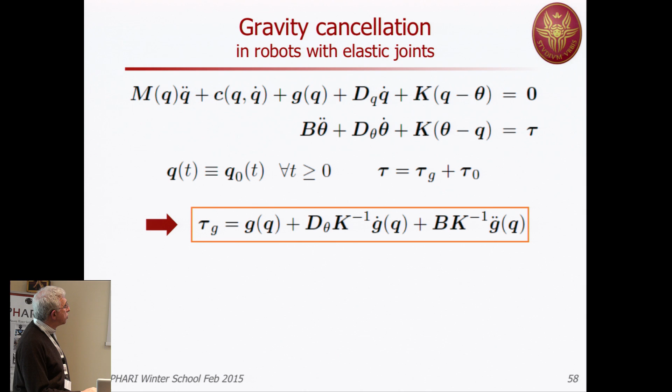Of course, as k goes to infinity, those terms are not important, and in fact you recover the rigid case. If these are negligible, you don't need to compute the first derivative, you just jump to the second derivative of g, and so on. This is just one joint.

And you may wonder if things depend only on the static part—so if you just apply g of q, and not the first and second derivative, if you get more or less the same results. This graph is just the comparison between the gravity and non-gravity cases.

First of all, you see that the motor of the two systems—the loaded system with gravity, and the model which has no gravity at all—of course the motor behaves differently. So we cannot impose the same behavior. It's the link that behaves the same, the linearizing output, but not the internal motor.

While here, you see the evolution if you're using the right torque, with G of Q and with the derivative first and second, or just a static compensation, G of Q. And you see there's a difference of the order of about 2 Newton meters over 10, so 20% is due to the fact that you're really correcting things.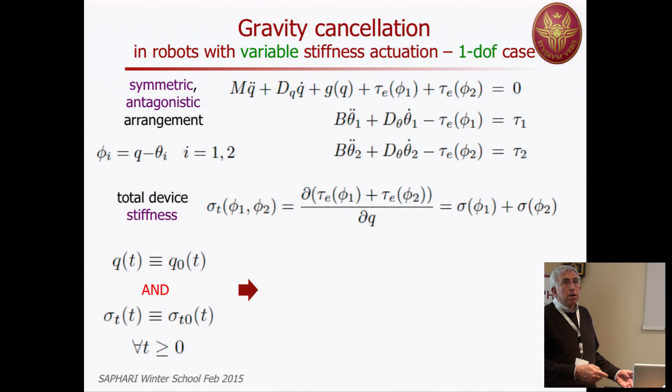So same thing, you want both the stiffness and the position of Q to behave as if the system did not have this G of Q acting on it. So you're imposing that Qt, the actual system, behaves exactly as the unloaded Q0, and that sigma t, the actual total stiffness of the device, behaves exactly like the stiffness of the unloaded system under the action of some torque, which you apply to both systems anyway.

And okay, this is the expression of the torque. You see it's much more involved, at least graphically. And in fact, it's not even a closed form solution, because you have to solve those nonlinear equations. It's only for special expressions of the joint elastic torque and the profile of sigma, like the quadratic case, that you can solve this analytically. Otherwise, you have to solve it numerically.

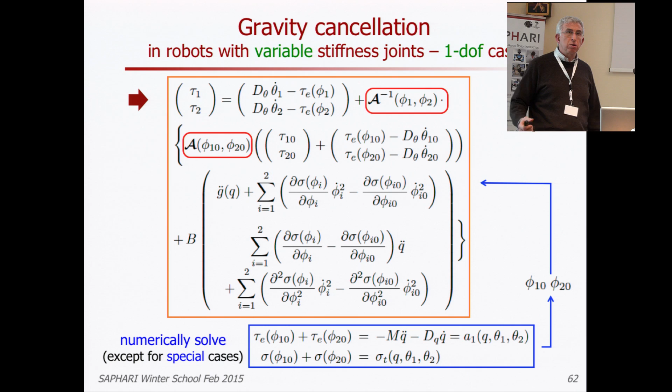So via feedback it's like twisting this over and having gravity cancelled, acting on the motion of the link. Of course, you can imagine that when I'm moving this and it moves exactly like this, the loading of the two transmissions and the torque associated to this will be different from this case. It's not a 3-card trick where you just let gravity disappear. Gravity will be focused on only one part of the system, while the things under control behave as desired.

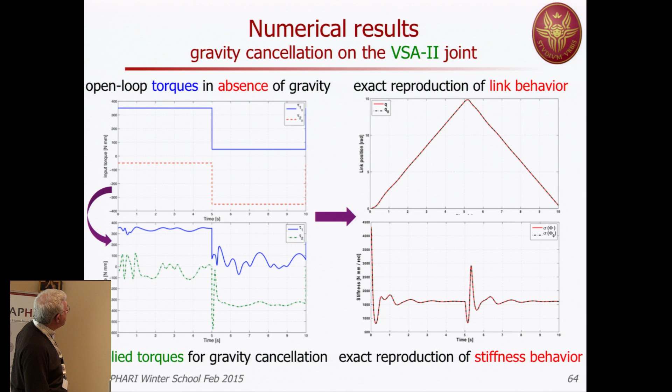And here, for instance, this is the situation: open loop torque in absence of gravity, so this is tau 0, the two tau 0. And in order to reproduce exactly the same behavior of the link, going up and down, or having this transient of stiffness, this is the torque you have to apply, the total torque you have to apply to the loaded system, which is clearly different from that, but you obtain the same behavior for those variables.

I think I can skip this. In fact, these results led us to design a nonlinear PD controller, which is capable of obtaining regulation globally with no requirement on the lowest stiffness of the device and on the lowest gain of the proportional term. Why? Because we removed gravity from the quantity that we wanted to control, so it's exactly as if gravity was not there. And this is the controller, whatever, I can skip that.

So in the last 10 minutes, if you can sustain me, I'll show some results on collision. I'll be very brief, because this is known material, just to show you the progression. In all my presentation, I'm always referring to what happened in the rigid case, then the elastic case, then the variable stiffness case. So again here, we started in 2005, 2004 actually, to work on this problem.

So a rigid robot with some control torque, whatever, open loop, PD, computed torque, you don't care. And then sometimes you have an extra torque, tau k, which is a joint torque caused by a link collision. You know that this torque is generated with some generalized force and moment acting somewhere in the structure, and the associated contact Jacobian generating these quantities. But you don't know these quantities, you don't know where the contact is, you don't know the intensity, you don't know anything. You know the model.

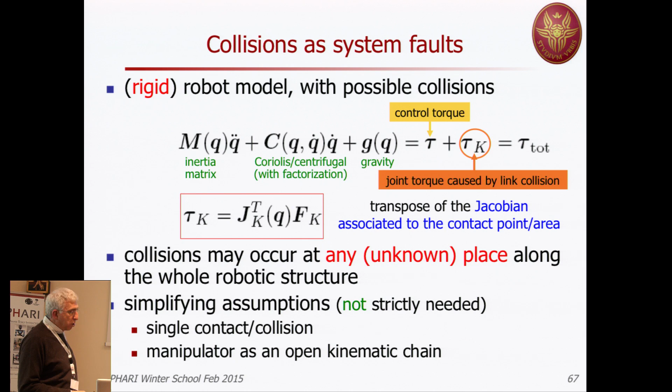So this was the situation, and you can model this like a system fault. Actually, we were working on actuation fault detection before, and we realized this could be used also in this context. The main idea—well, we had several variants—was using the total energy for just detection, or using the generalized momentum of the system, and monitoring the generalized momentum. Why is that? Because the generalized momentum has a nice property: if you write down the dynamics, it's a first order dynamics, and you'll see that there's no inertia matrix. So each component of P is affected only by the total torque acting on the right-hand side.

One part of this torque is known because it's the torque applied by the motor. The residual part is exactly what is caused by the collision.

By monitoring P in a proper way, you can detect, because you can also build a simple total energy scalar signal. While monitoring this, if the scalar is 0, there is no contact. If it becomes different from 0, over a threshold due to noise and uncertainty, then you have a collision. But you don't know where this collision happened.

With this momentum and the residual vector built upon it, we have a lot of information on where the contact occurs, and then we can react to this contact in a safe way so as to abandon the collision area. So the system is like this.

We have a permanent collision monitor that detects and isolates. Sigma is a scalar which monitors the total energy, and R is the residual vector that monitors the evolution of the generalized momentum. You have some threshold, then you recognize a collision, and then you can react, deactivating what the robot was doing, and providing the reaction torque in response to some collision, without knowing where. There's no extra sensor, no Kinect, no tactile sensing in this situation.

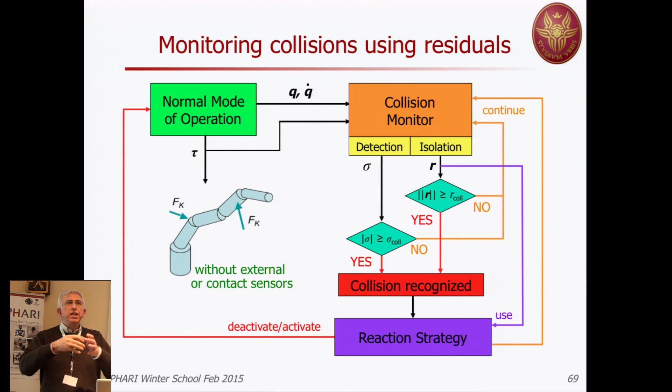If you have a collision here, and then while retracting from this collision you have another collision here, you react also to this, and so on. It's like a robot moving in an artificial potential field, being repulsed by obstacles, only that this is not artificial, it's real, because there are forces applied to the system.

Okay, so I skip this. This is the form of the residual vector, something you can compute based on the model. No mystery, just Q and Q dot, this transpose of the factorization matrix of the Coriolis and centrifugal terms, and the applied torque or the current. Here everything is rigid.

The evolution of this vector is that of a linear, decoupled, stable first order filter. So when this goes back to 0, this means the contact is no longer present. Otherwise, it reacts as a filtered version of the joint torque resulting from the contact, whatever this contact is.

I'll skip this too, and then there are reactions. So this is for the rigid case. Now, we never did an experiment on a rigid robot where we had the dynamic model and access to all these things. The first experiments were made on the DLR lightweight robot, this one, the DLR3, where we had joint elasticity.

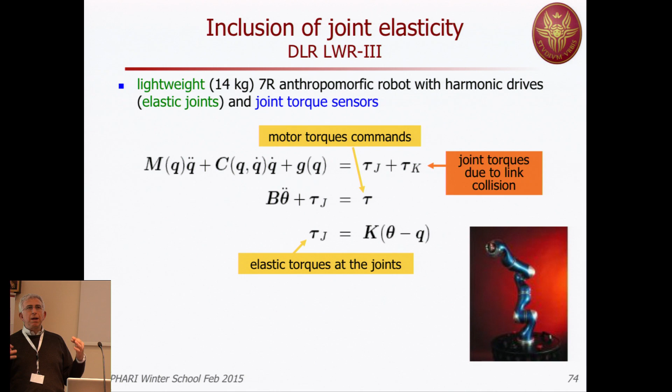This method applies to the joint elastic case, and it has also a nice feature: it applies as such, only replacing the applied torque to the motor with the measured torque that the joint torque sensor provides to you. This is one way of implementing exactly the same algorithm.

So this is the model we discussed before. Tau j equals k times theta minus q, but in fact they are directly sensed. We are measuring theta and tau j, and from this reconstructing q, and q is used inside here. Then we use exactly the same formula as in the rigid case.

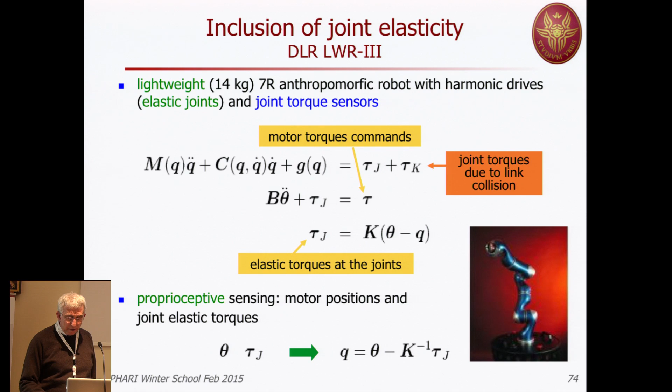Pay attention: the only difference is that instead of having tau here, you have tau j. So instead of using the applied torque from your controller that you know in advance, you're using the measured tau j from the joint torque sensor in the computation. This is the expression of the residual. I label it elastic joint because it's exactly the same as before, only with tau j in place of tau.

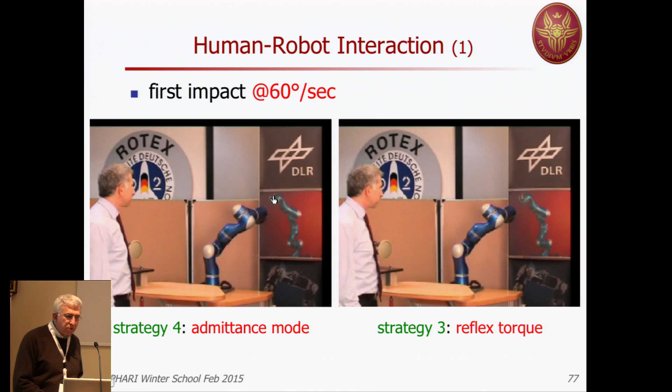Let's skip this. Of course we need zero gravity, and just to get an idea of the behavior, these are 2006 videos. Here not only do we recognize, but we also have some reaction. This is admittance mode: based on the residual vector, the robot stops and then applies some velocity at the joints, proportional to this residual.

So it's proportional to the estimate of the joint torques acting on the joints, because I'm touching the robot here and there. I don't like this admittance mode strategy too much. I like this reflex torque, as I called it, because it is much smoother.

Okay, and in fact it's very friendly. I remember that day everybody in the lab wanted to play with the lightweight robot.

Of course you can also have a first impact at 90 degrees. You've seen this robot moving, doing its test. Then there's detection and reaction, not just stopping the robot—this is the elementary reaction. What iiwa is implementing is exactly this method, only that they have detection but don't make any reaction because they don't feel confident. So the most simple reaction they can do is just stop the robot, but other than that, it's exactly this method implemented.

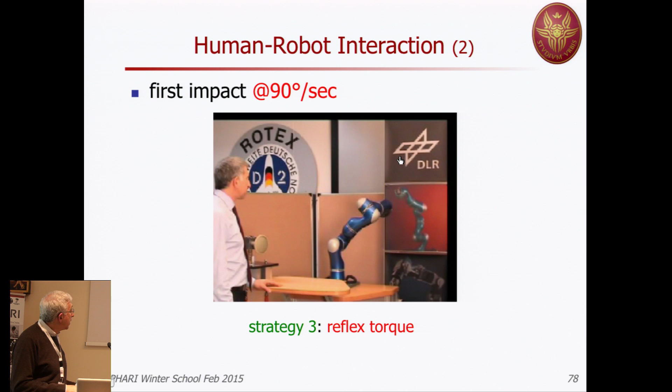Here the robot is coming against me at much higher speed. You're certainly familiar with the video by Sami Haddadin with the knife and the pork, hitting the head and so on. This was all implemented in the joint elastic case.

So what can you do for the variable stiffness? Well, you can do more or less the same thing, but here we had another idea. One of the problems of variable stiffness is that the stiffness itself is changing in real time because you can control it, and you don't have a direct measure of that. This is why on Tuesday you'll hear a talk by Fabrizio Flacco on online estimation of stiffness in variable stiffness devices. So you would like to get rid of this.

How do you do this? You just modify the way you compute the generalized momentum. Instead of computing the link momentum, you add the momentum due to the motion of the link and the momentum due to the motion of the two motors. If you write down the time derivative of this expression—this is the single link case, but exactly the same applies to the multi-link case—you can build up this residual, a scalar in this case because it's just one joint.

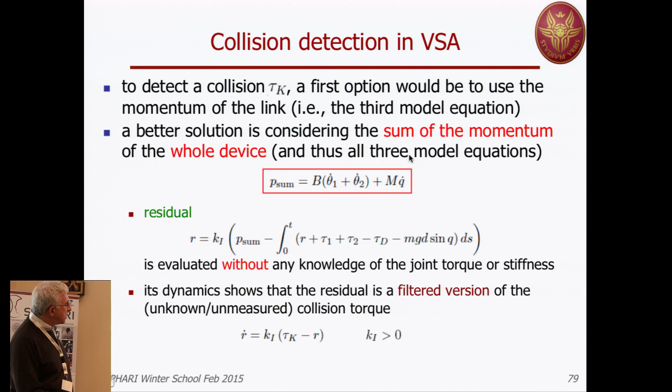Then the evolution of this will exactly be that of a filter, a first order filter, driven by the unknown collision torque tau k. You start with R0 and this remains at 0. As soon as this changes, R dot will change, so the R signal you're computing will drift from 0. When you remove this, because of the stable filter situation, it will recover exponentially to 0, so you can also recognize that there is no longer a contact.

And in this expression there is no information about the stiffness of the joint. So we remove this by just combining the component of the generalized momentum from the motor side and the link side. I'll skip this—there are also reactions, but okay.

This is the multi-degree of freedom version, as long as this model applies in that case. By the way, this model applies exactly if the assumption A4 of Spong holds for the joint elastic case. So if you neglect, in the kinetic energy, the angular part of the kinetic energy of the two motors of your variable stiffness device in this antagonistic case—if you neglect the part due to the fact that the motor is rotated around by the previous links, which is again a very reasonable assumption—then you can extend the one DOF case to the multi-DOF case and nothing changes.

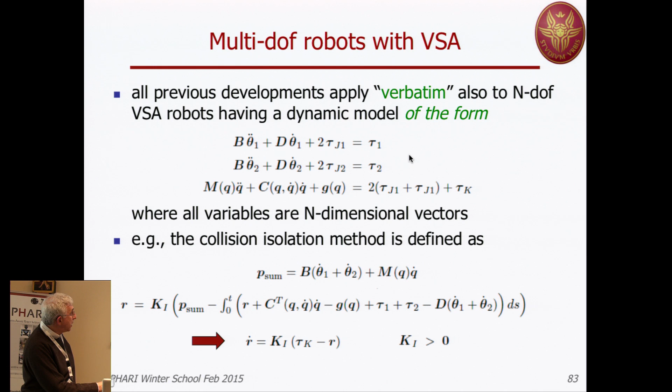So for instance these are now all vectors. You see this is the momentum of the link side. These are the two momentums summed up of the motor side with diagonal inertia matrix. This is the expression of your residual, and you see there is no information on tau j ever entering here—only the two applied torques you're using. So if you're using PD or nonlinear feedback, you have to put exactly what you're commanding to your motor here, or the current you're commanding with a scale factor, inside this expression of the residual, and everything will work.

In fact, this is the last slide. This is Nico Mansfeld from DLR trying the method on the DLR hand arm system, which is driven by their VSA devices. It's called HASY because it's hand arm system, I would say. You see this was the first experiment by Nico, so he's a bit scared at the beginning, but okay—here there's no reaction, just stopping.

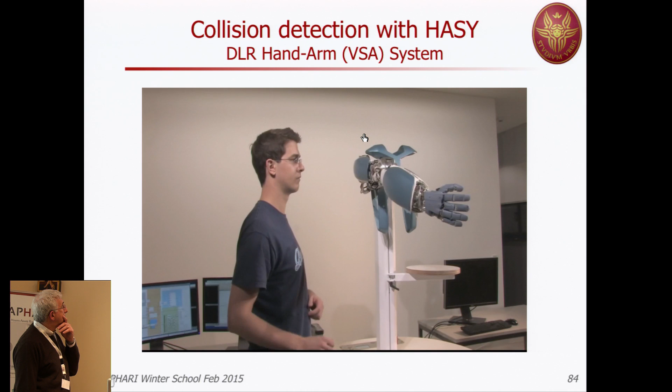So the same concept as I showed moves from the rigid to the joint elastic case to the variable stiffness case, even in the multi-DOF situation.